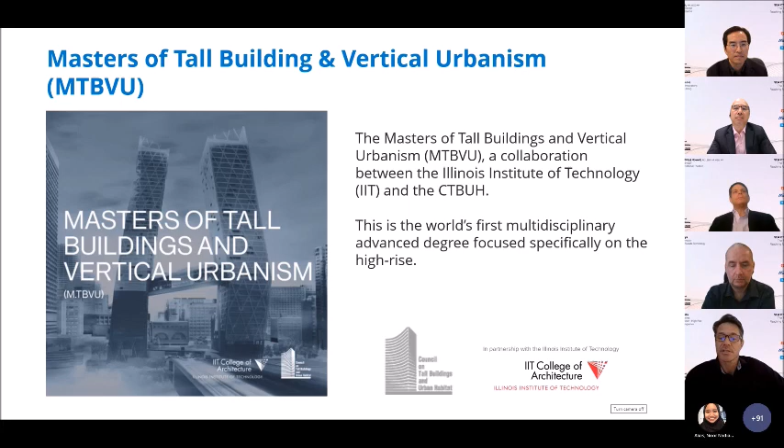Now, the Future City is actually a global conference that's already taken place over 19 plus cities. Some of them physical, some of them webinars like they are today. But it's been really great to see us change our program. I had a chance to actually participate in the London and the Copenhagen event. Really happy to be here with you today too. But it was so nice for people to get together again physically to be able to meet and discuss. And so far, the Future City conference has been over 1,000 delegates, 200 plus presenters in close to 20 cities

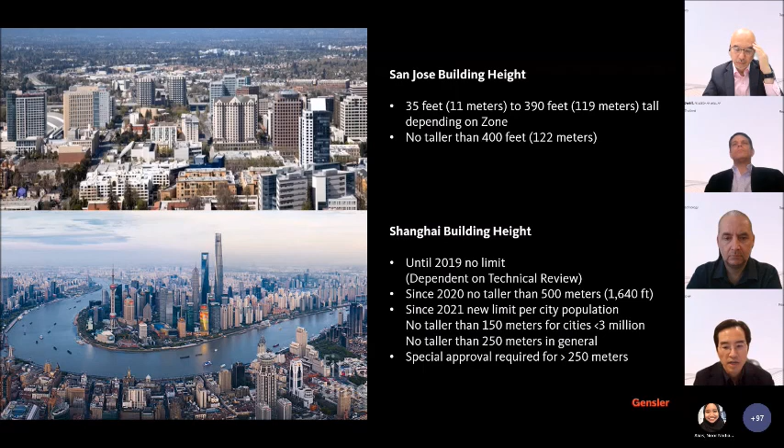So all this shows that, as supporters and fans of tall buildings, as designers and developers of this building typology, we get fascinated with the height and features and the facade design and things like this. But ultimately, the tall building is to bring density and people into the city. And we have to remember that we want to bring positive impact to urbanization, and that all this is to create a healthier and more sustainable city for the region and for the people living inside.

And the taller we build, the technical challenges become greater, and this requires an additional amount of resources and investment. So really, why we want to build tall and how we can build the best tall building, I think that is a question we have to remind ourselves and remember. And I think it's easy to overlook these from time to time.

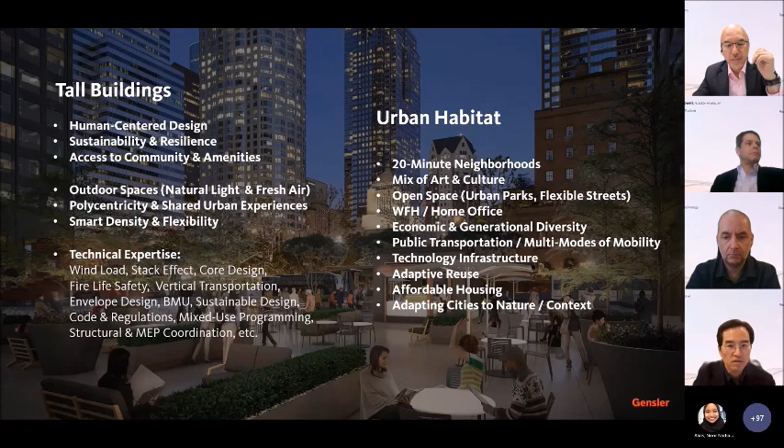The first project is Zhongnan Center. This is the last project I worked on in the Shanghai office. It is 499 meters tall, so just under the 500-meter limit. It is currently under construction. It is near a grand lake and has access to the parks, the canals, and is on axis with the old city and the new city. So it's in a very prominent and beautiful site.

As many developers do, same in China and in the US, the client wanted to really maximize the floor plate, make sure every square meter was utilized. So this building, unlike other super tall towers, really stays straight. It tapers very minimally, and this created a big challenge, not only architecturally for the massing, but structurally because of the wind loads and the core design.

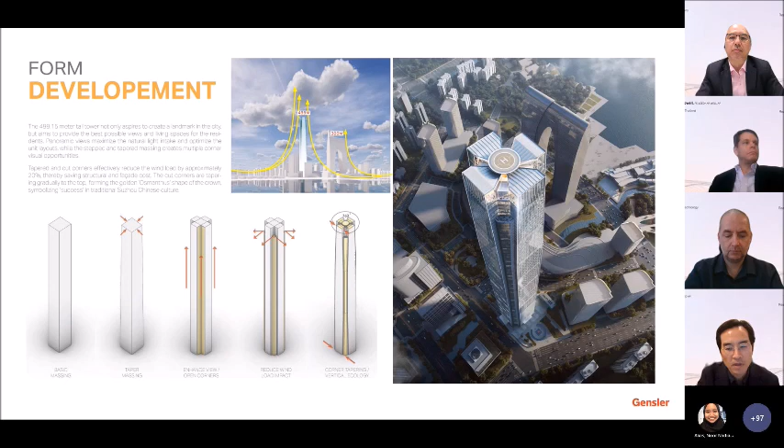So first of all, we try to taper the tower as much as possible, and then we cut the corners to reduce the wind load and disperse the wind path, and still fill with another layer of interior spaces. So we keep the area, but sculpt the exterior so it visually looks less bulky, but also works for us structurally. The biggest highlight and most interesting part of this tower is that it has 7 interior atrium spaces.

So it's a mixed-use tower with office, hotel, apartments, service apartments, and observation. And in order to maintain a livable and a unique residential space, the client really wanted to have these interior courtyards. So mimic outdoor courtyards would bring them into this tall building, which really hasn't been done before. I can only imagine Jinmao Tower, but that's a hotel, and at the very top with different conditions.

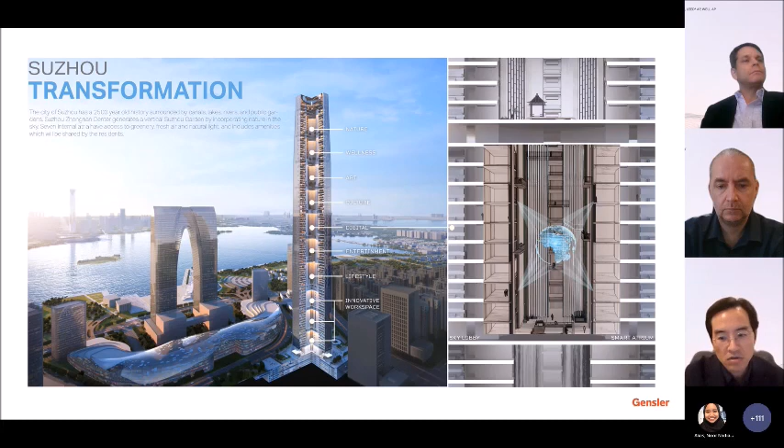So this was one of our biggest challenges, and this really inverts the core design. So rather than the central core getting smaller from the outside as the building goes up, this one, the outer face of the core stays the same, and it becomes hollower and hollower. So we make the atrium bigger and bigger as the building goes up. This creates a very interesting space, but also creates a problem. How do you make this space habitable, humane? And we had to integrate technology in order to resolve this challenge.

So to bring natural light, daylight, and to make a more healthier space, we integrated fiber optic cables. Now there are new technologies where there's solar collectors on the roof which follow the path of the sun, and you can bring daylight into these deep spaces. Not only is this better for people psychologically by feeling connected to the outside, but also it brings the full spectrum of light indoors. So you can grow a wider range of plant species and trees.

Also, to improve the interior condition, we supply fresh air from the bottom. So it has an underfloor air supply system, and the exhaust is at the top. So this creates a natural flow of air, and also minimizes the volume of space we need to condition. So it's more efficient and also healthier and more comfortable for the people inside.

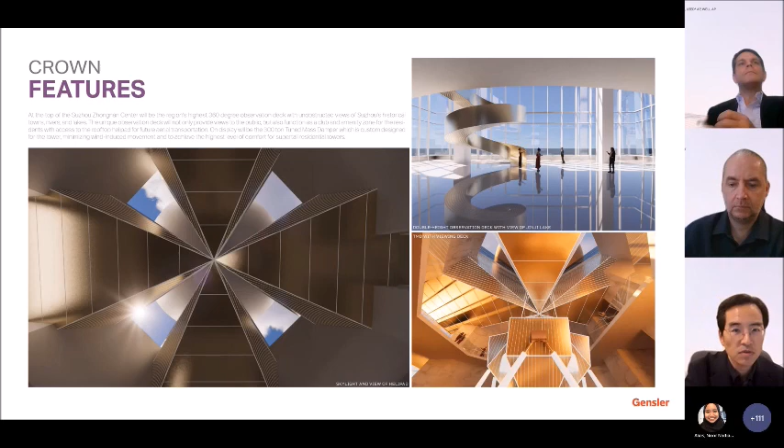And at the top of the building, we have an observation deck with a tuned mass damper on display. And again, we try to really maximize the view, also bring daylight into the building. So in the center of the crown, above the TMD, we have these skylights where daylight is brought into the building, where you can see the sky from the center and view the lake with 360-degree views. So this is the view of the crown, where we really tried to maximize transparency, connection to the outside, and views to the surrounding site.

Next project is another 500-meter tower in Fuzhou, and this one tried to bring nature into the tower in a different way. This also is a very complex mixed-use tower, and as most of you know, a single-use tower is really not practical nowadays with the sheer height and amount of floor area. But also, in order to make this economically viable and a 24-hour building, the client and the developers really tried to mix program, and the residential part is key, because they can sell the units, but also it makes the building alive and functioning throughout the day and the year.

Where the previous tower had the residential up in the top zones, this tower actually has them on the bottom portion, and this was due to a regional regulation where apartment buildings cannot be taller than 150 meters. And the government said, although this is a 500-meter tower, the apartments cannot exceed 150. So we had this unique situation where the floor plates are the biggest. We have the residential spaces, and the offices above occupied the smaller floor plates.

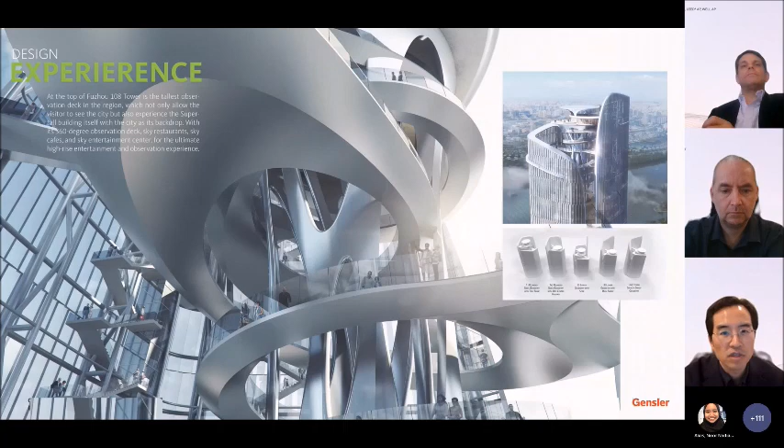Through various studies, we tried to understand, I'll skip some of these images, how to make use of these large floor plates. And eventually, we have carved out the main area facing the ocean, and create this large atrium space within the residential zones. So if the previous project had the atrium in the center of the core, now we have an atrium facing one side, and this is the southern side of the tower.

So this is a little bit similar to the Shanghai Tower diagram, where we have a sky garden within the tall building atrium. But what's different is the outer layer here is much more permeable with operable facade, which allows natural air and light to come in.

So this is a semi-indoor-outdoor space. So you have the benefit of not leaving the building: directly outside your apartment, you have this indoor garden or park at every 10 floors. And this also creates a buffer from the southern sunlight in the summer and can become a solar collection space during the winter times. So these are two different ways we try to bring nature and a more park-like outdoor space into these tall buildings for a 500-meter tower.

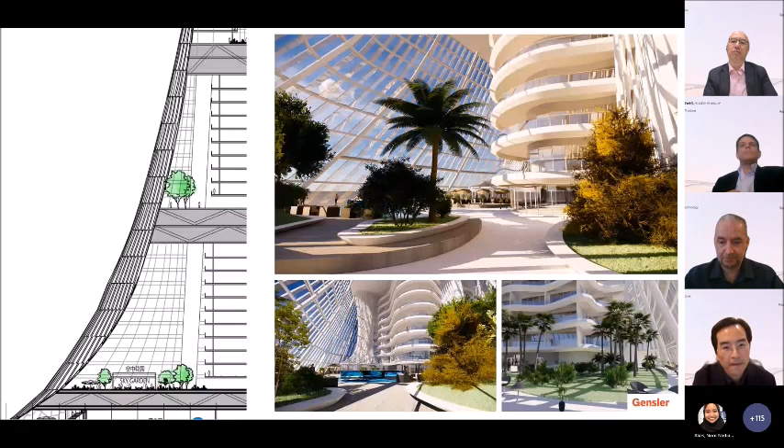And we are really trying to introduce this hybrid tall building typology where we are creating these more massive floor plates, but carved and cut to create a more human scale space on the ground, but also bring in daylight and air into these deep floor plates. Again, similar to the first tower I showed, the developers are really trying to maximize the efficiency, which is part of the reason that the massive floor plate design is happening.

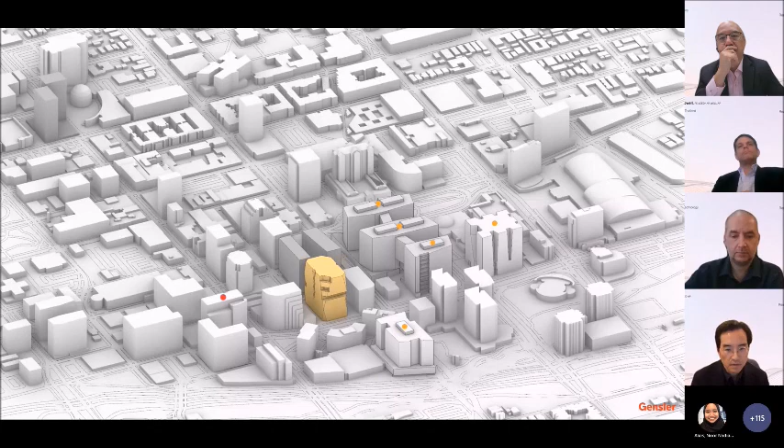Also, because of the technology companies' request to have these large flexible floor plates where they can lay out different programs, shift the interior layout if needed, and also promote communication and more interaction between teams and groups. So the floor plates are getting bigger, and interior connections with stairs and other visual connections become more important. The red dot again is the location of Gensler's office, just to give you a feeling of downtown San Jose and where we are located.

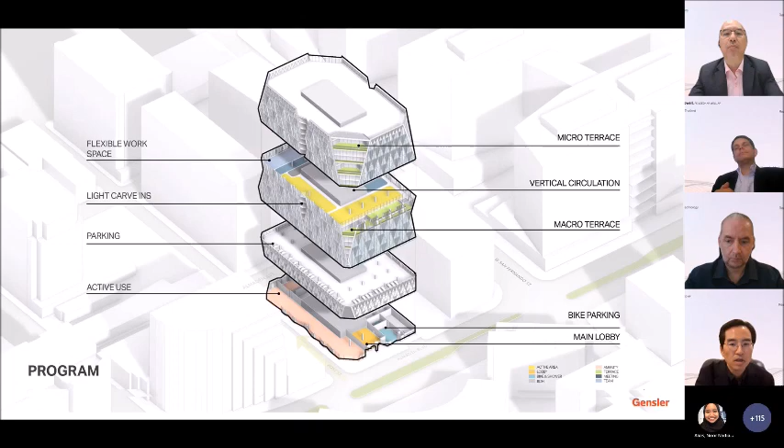So here we started with the maximum buildable envelope, and then studied the views and spaces where it would be best to create these outdoor terraces to have views and outdoor spaces where people can enjoy. So towards the internal side of the block, we have flexible working spaces, and towards the outer side, the main street and corners, we create these micro terraces and macro terraces where people can enjoy the outdoors and take a break from work, but also integrate and socialize for collaboration, recreation, and even dining.

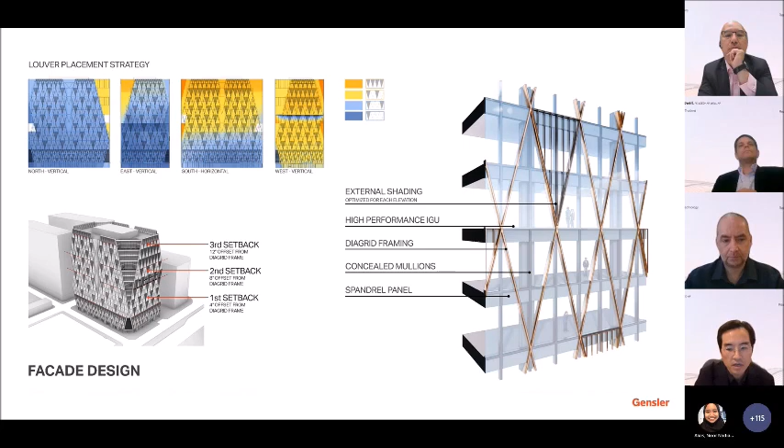Also, we've done extensive solar studies to understand what type of sun shading we could introduce to the building. So on the north, east, and west sides, we have added vertical louvers to reduce glare, but still provide views to the outside. But on the southern side, we have added horizontal louvers. So we are customizing the facade details depending on the solar condition and orientation.

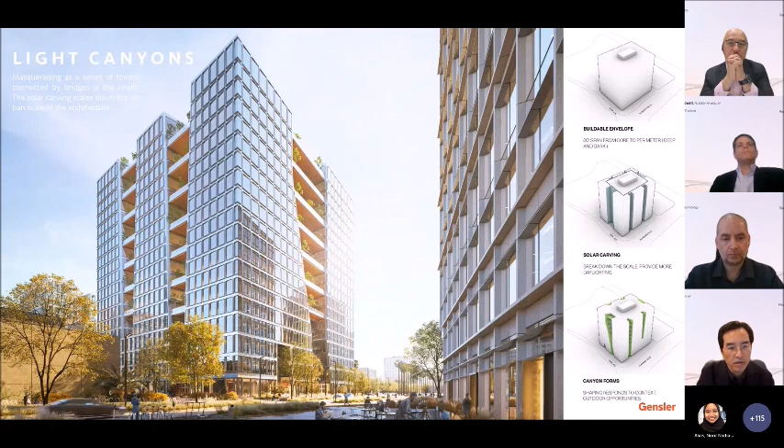This project is another project inside downtown San Jose, and we have a similar idea of creating these outdoor balconies. We've called them bridges in this case, and again, the block is a massive block with 80-foot deep floor plates from the core. So they're almost 25 meters deep, which is more than 1.5 of a typical office lease space. However, we've carved these light wells or canyons so daylight can penetrate deep into the space and naturally create these outdoor break spaces within the space.

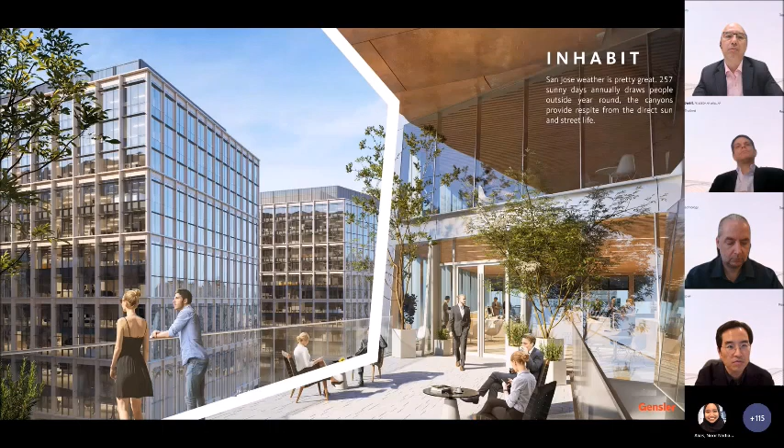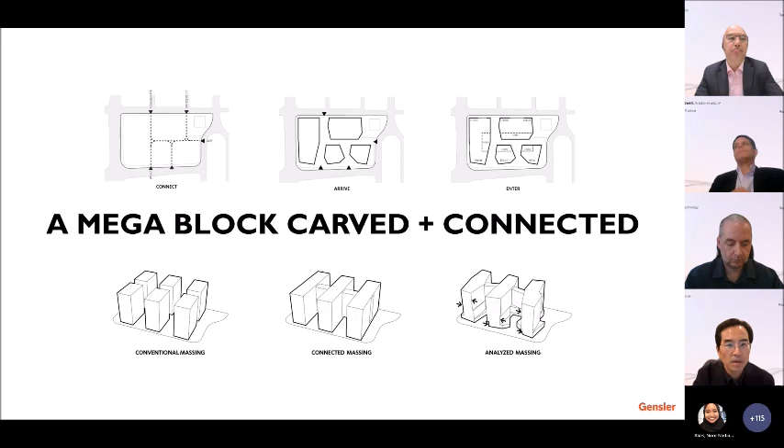Here again, it's a great site directly next to a city park, and this project again tries to take advantage of the large city block that it's occupying, and we have created these 3 broken blocks connected by sky bridges. So at the ground level, the paths are connected with the existing streets and alleys to bring people in, but then we carve away spaces to create natural entrances and resting spaces. So the park system is brought into the block and then also brought up into the upper levels through the bridges and the roof garden.

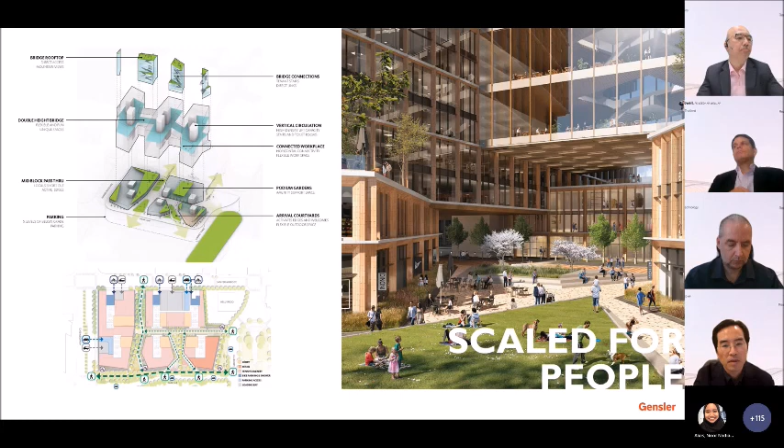So we are trying to connect to the human scale on the ground, and then with the people and workers on the upper levels. The height of these towers are about 110 to 120 meters. And if you compare the dimension with a 300-meter tower that I worked on in Shanghai, it's actually quite comparable to cutting this 300-meter tower into 3 blocks and connecting them with bridges.

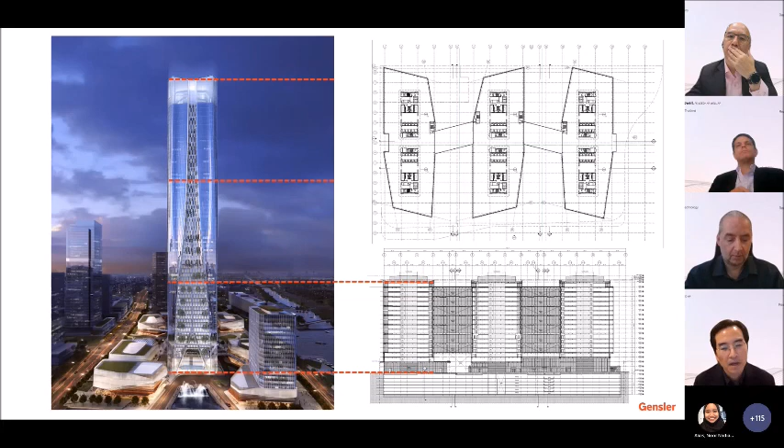So on the left, where we try to integrate these outdoor spaces on the face of the tower, we're able to do the same with these sky bridges and at the ground level parks connected to the city park.

So that's the conclusion of my presentation. Once again, this journey has reminded me that tall buildings are for the people and for the city, and it's the urban condition and urban habitat that we are trying to improve. And the tall buildings are not objects on themselves, but part of the urban environment.

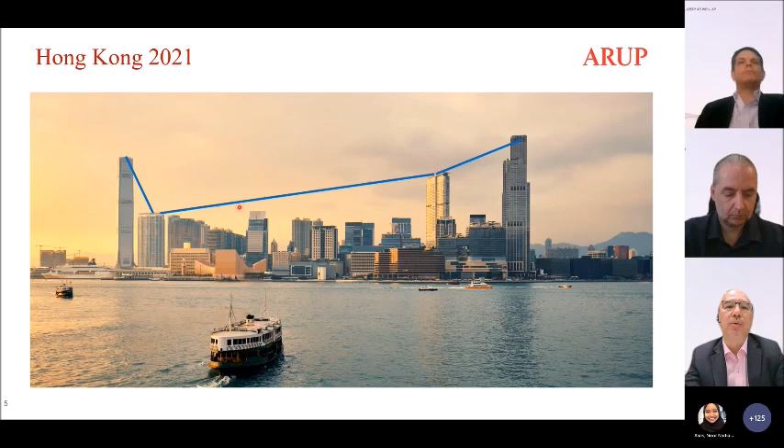At the same time, the population of Shanghai increased - in the 90s it was probably less than 10 million people, and now we have 26 to 28 million for the whole of Shanghai. Remember, Pudong is just part of Shanghai - we have other areas also developing. This new skyline has changed, marking another remarkable journey for the city and for the world.

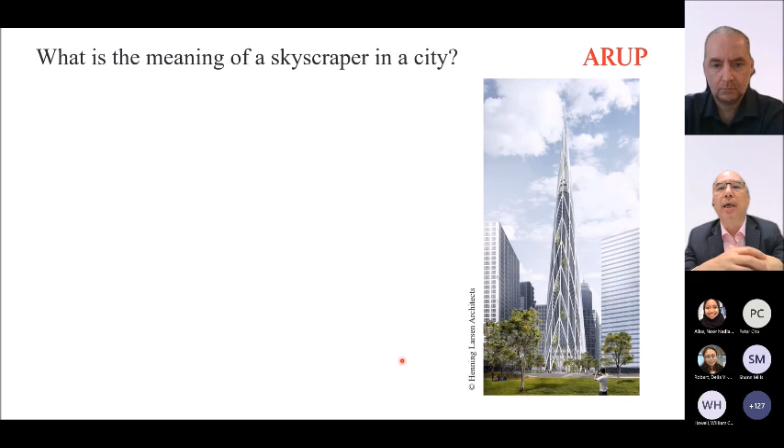So we will ask a question, what's the meaning of a skyscraper in a city? What's the meaning? Why do we have to go for tall buildings? Of course, some people will say that it's a symbol of money, power, or economic status. I quite agree with it. But at the same time, maybe it's because of the city density.

City density is also a function of the income of people. That means if you go to a city, the more density a city has, it's supposed the income of the people in the city is more, compared with the rural or suburban area. You look at Tokyo, London, New York, Hong Kong also - I think you will see this function.

Or probably some countries or cities want to say, 'I want to have a flag in the world.' At the same time, when you look at the building, it will remind people that this is a building in which city or country. I think lots of cities would like to do so, because they want to increase their tourism, etc.

This is why I say every city should have its identity, or I could call it the light of a city. So when you look at the building, you will see what city it is. You look at ICC, this is Hong Kong. Or you look at the CITIC Tower, this is Beijing, or Shanghai Tower, this is Shanghai, etc.

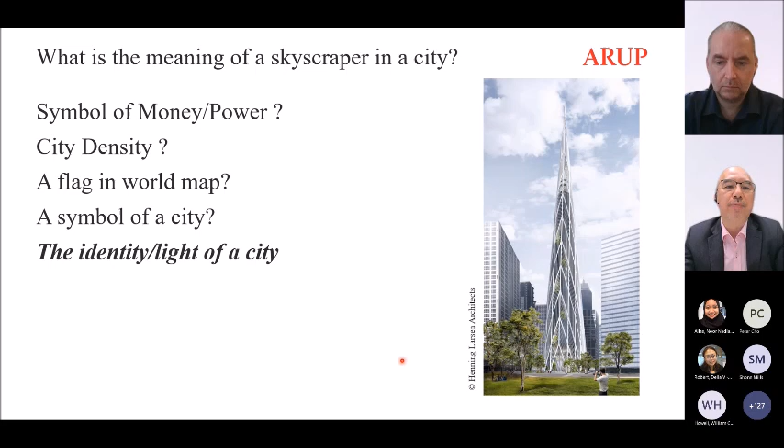Now you will see whether it's about the functional building, or whether the ambitions of the developer are to go higher, or they want to fully utilize the area. This is another thing that we should look at.

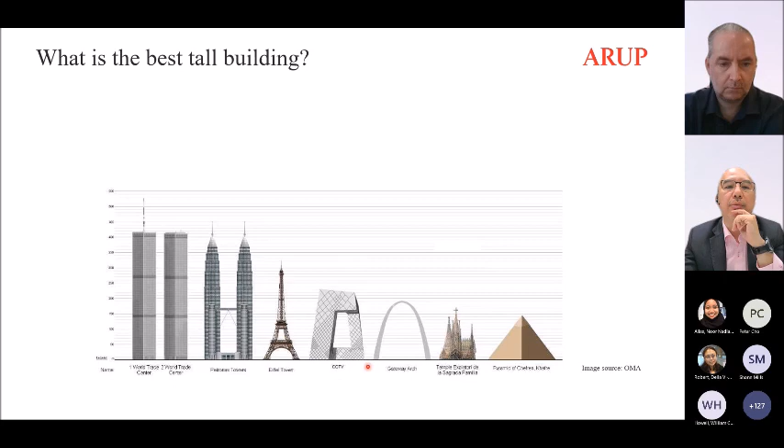What's meant by the best tall building, right? Everyone may have their own definition, whether you want to be in shape, or in form, or so.

Koolhaas said that instead of competing in the hopeless race of ultimate heights, dominance of the skyline can be achieved only for a short period of time, sooner or later. That means you say, wow, this is the tallest building, but what he means is probably that the fame is very short, because another challenge will come, and another, and another.

That's why when he created the CCTV building, he had a different way of looking at it, by means of artistic expression, a very special form, to make it spectacular. This is probably the way a lot of architects and developers are looking for.

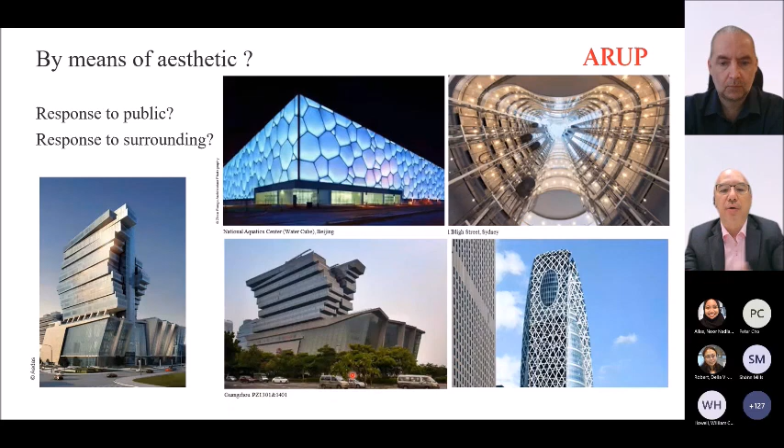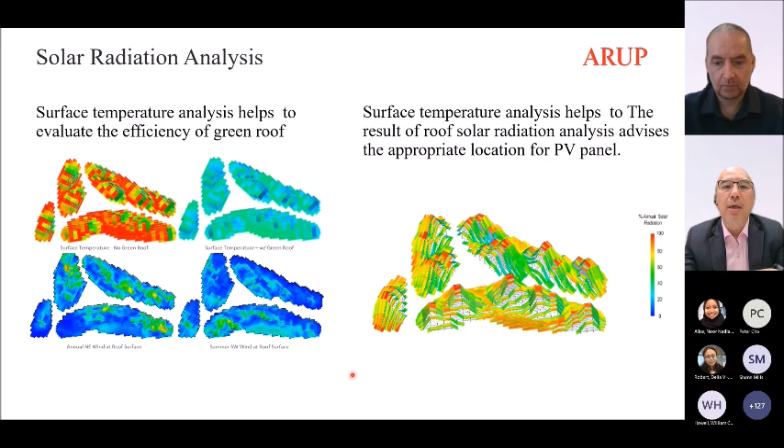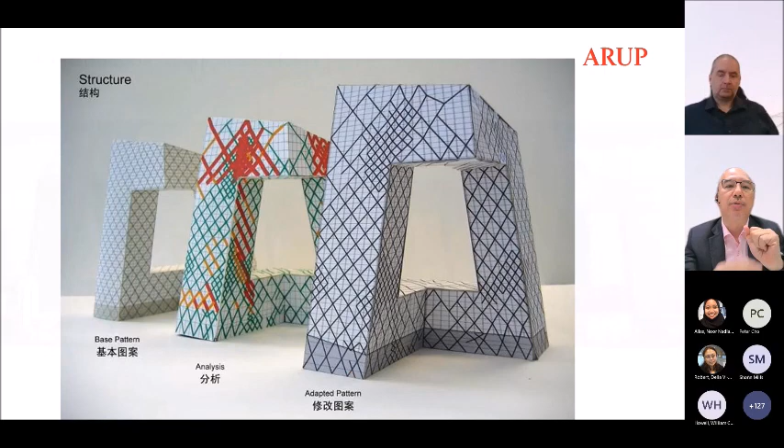This unique pattern and form also created a lot of challenges for us as structural engineers in terms of how it was going to be built. In the design, we had already considered a couple of ways of doing it, and we were fortunate that the contractor came up with the one we liked most - and also the one with the most challenge.

It linked up, all within the tolerance of our prediction. So among the elements of a skyscraper, probably function is one.

And of course we need to consider sustainability, and uniqueness. All these - we also need to consider energy efficiency, artistic value, iconic status, technology, and timing. Technology and timing are sometimes important for engineers because we are limited at the moment.

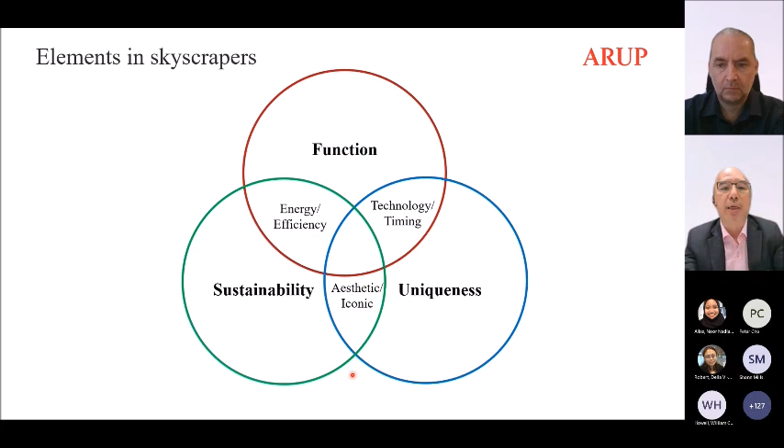Usually our technology is limited to things like concrete and steel reinforcement, or steel. Whether we can go for even higher strength concrete or higher strength steel all affects and limits our creativity or innovation. But because of these material limitations, what we can do is have an innovative mindset to solve the problem - creating different structural systems to suit different heights of buildings and different forms of buildings.

Now, there is no perfect structural system, right? Every building, because of its uniqueness, because of its geometry, we have to design to suit. And sometimes we will create a new system in order to suit. And you go for a bit low rise; my definition of low rise is like 150 meters, and up to super high rise will be 600 meters, etc. All come with a different form, different structural form, different lateral system.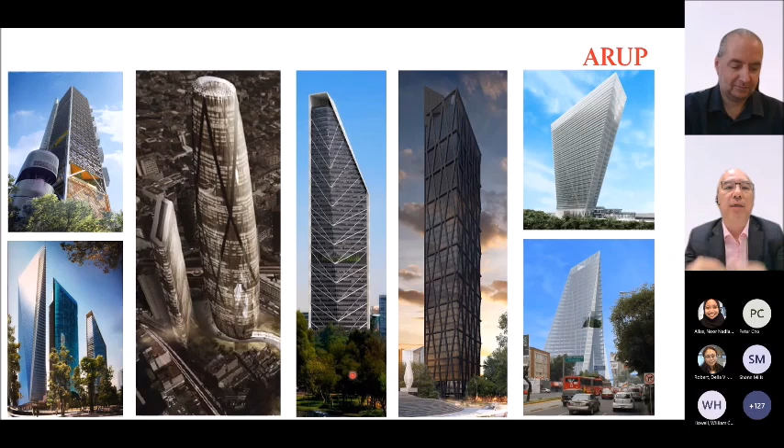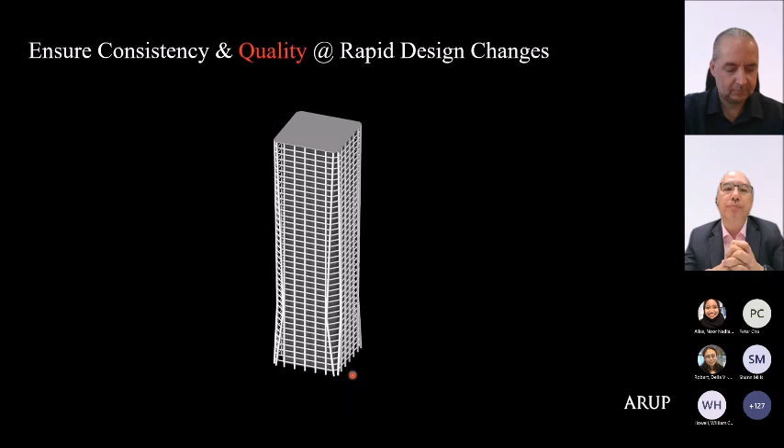But of course, it's not that simple as well, because now architects have new ideas, a very contemporary art concept requirement. So we have to find a new way of solving the problem. In order to solve the problem, we have our own artificial intelligence system that will help decide whether we should use a tube-in-tube system or mega brace system or outrigger system and so forth. It helps the engineer decide what's best, and also meets the function of the building, whether it's an office, residential, and so on.

And for BIM, people may say, yeah, we use a lot of BIM. So what is next? The next is we have our own smart AI console now for buildings. With BIM, we can also put lots of sensors, so that we can capture the behavior of the structure from day to day, week to week, year to year, and calculate the energy consumption, how we can improve it, which season we need more energy, or which season less energy, and so forth. So it looks like a person, okay?

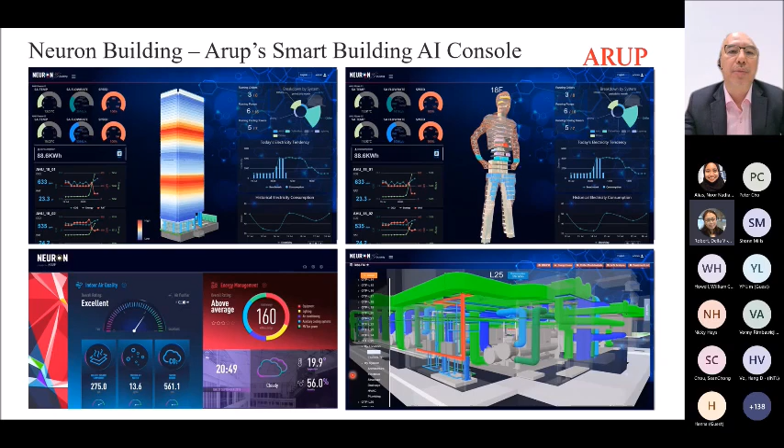So a lot of cities have a landmark: in Chongqing we have Raffles City, in Guangzhou we have the Guangzhou Sightseeing Tower, in Thailand, also in Vietnam, and even in Cambodia. So again, whether your city would like to have a landmark, to show your existence to the world, that you are a great city.

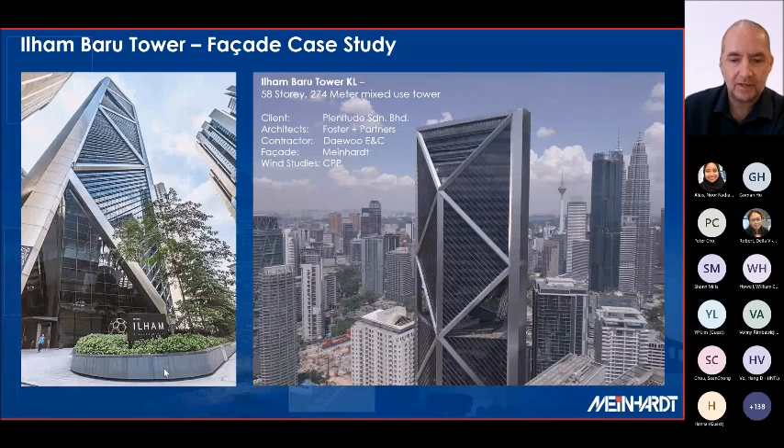Hi, we seem to be experiencing some technical difficulties on Nicky's end. Let's give him some time for him to sort it out. Nadia, we have a question that was missed for Dr. Goman, right? Sorry, has my sound come back? Hi, Nicky. Yeah, we got you back. Just reshare the presentation. At least it wasn't the blue screen of death, but I was very worried there for a minute. Let me re-present. Have I got my presentation back? Yes. You can still hear me? Yes, this is the last slide you were showing. All right, I don't know how much you missed, so I'll just pick up where I left off and fingers crossed that that doesn't happen again.

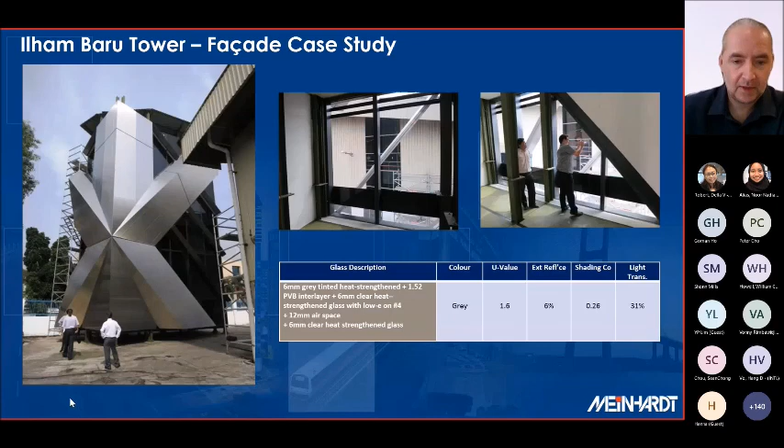Various glazing options were considered, and a grey tinted glass with a visible light transmission of 31% and a shading coefficient of 0.26 was selected as appropriate, which from the outside looks very dark, as you'll see here, but from the inside looks perfectly clear. That's due to the kind of neutral tint of the glass. So you don't really notice the tint from the inside. So through a combination of high-performance glazing and diagonal shading devices, a 40% reduction of solar heat gain to the tower was achieved. The facade contributed to a LEED Platinum rating award for the project.

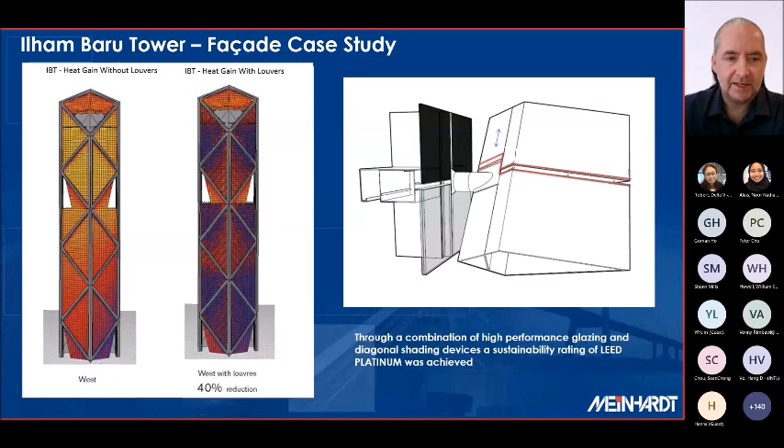So typically for very tall buildings, an ideal facade installation would consist of unitized panels that are launched from nearby floors into position with all the fenestration elements such as louvres, bullnoses, etc., already fixed onto the panels. And all of the launching would happen on the inside face, and you wouldn't go outside hanging off the building to undertake any additional fixing.

IB Tower had to buck this trend, however, because of the megastrut cladding elements. So we needed external access via mast climbers to install those megastruts. And you can see here a series of brackets first. After the brackets, we had subframing, and then the panels were installed. So it wasn't the most ideal method of undertaking a tall building facade, but it was necessary for this particular type of installation works.

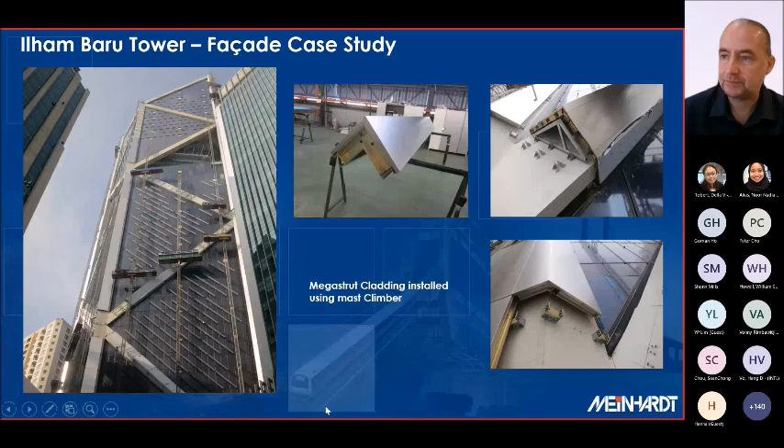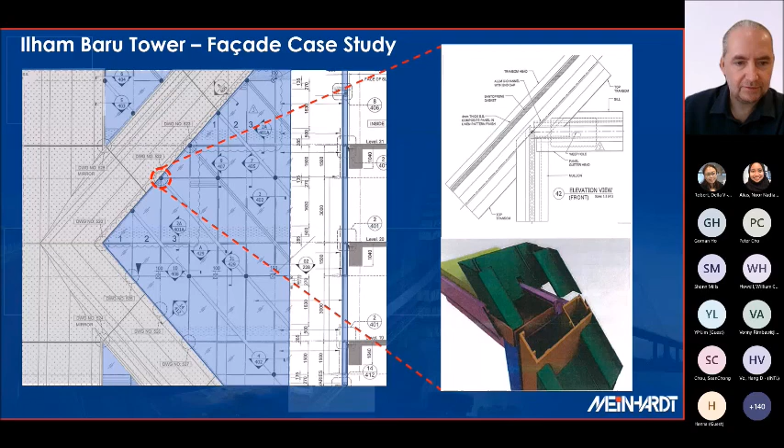In terms of wind and pressure studies, the first exercise undertaken was a cladding wind tunnel test. So the Malaysian code 1553 was used to estimate the cladding pressures, and a maximum pressure of 2.2 kPa was calculated. You can see the graphic on the left-hand side here that shows how we undertook that study. During the wind tunnel test, the pressures recorded never exceeded 2 kPa. So this allowed for the facade aluminium member sizes to be reduced accordingly.

As a majority of the curtain wall was in a 1.5 kPa zone, which is shown here in blue, we then used that to engineer the profiles, and then we would stiffen them only in areas where we exceeded that. So we never really follow the maximum wind pressure that we get off a wind tunnel test. We go with the majority and then just stiffen areas accordingly. So big savings on aluminium costs as a result of that.

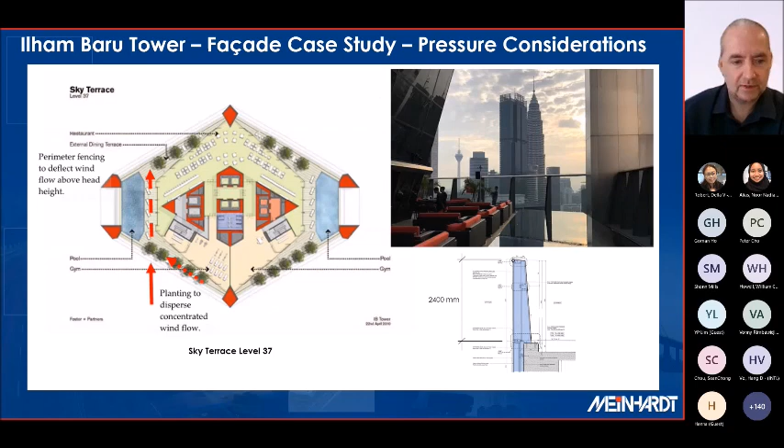So we brought in a 2.4 meter barricade around the perimeter there, which shielded against these cross breezes that will give you a problem, but still allowed an ambient temperature and ambient breeze. So you can see there's a very calm water as a result of that study.

The problem being, when we checked the pressures and the study of what would happen to these internal spaces as a result of those doors being open, we got a direct path of air infiltration or pressure infiltration into the lift shafts. So we needed a double lock system, because if you allow these high pressures into your lift shafts, then your lift doors may jam, or the travel could become less smooth and noisy. You can hear the gusts.

So there's two concerns with lift shafts in tall buildings that have an influence on facades. So the first, as per the last slide, are concerns with direct air paths through the facade to the lift core. These can come from openable windows, doors, lobby area, louvres, building breaks such as MEP floors, etc. And we've highlighted on this slide here all the various zones that would allow these pressures to go in through the facade into the lift shaft.

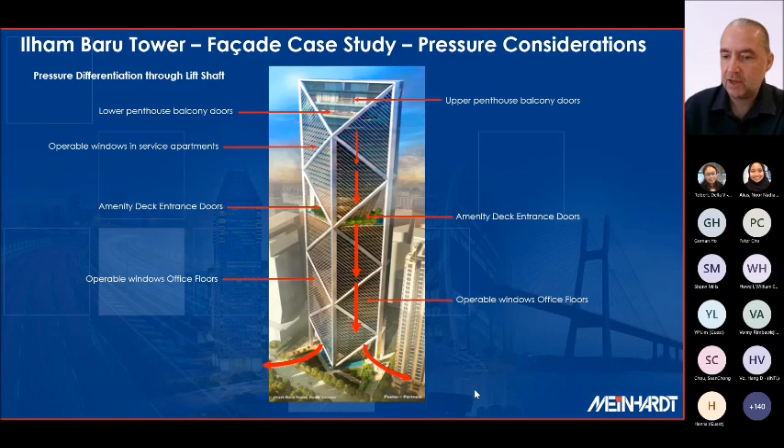And a lot of tall buildings use vestibules, or in some cases revolving doors, to limit this, and then your wind engineer can undertake simulations to evaluate the success of the proposed approaches. So after reviewing the level 37 wind studies, it was agreed the external deck entrance doors would become automatic sliders. I've got some video footage here.

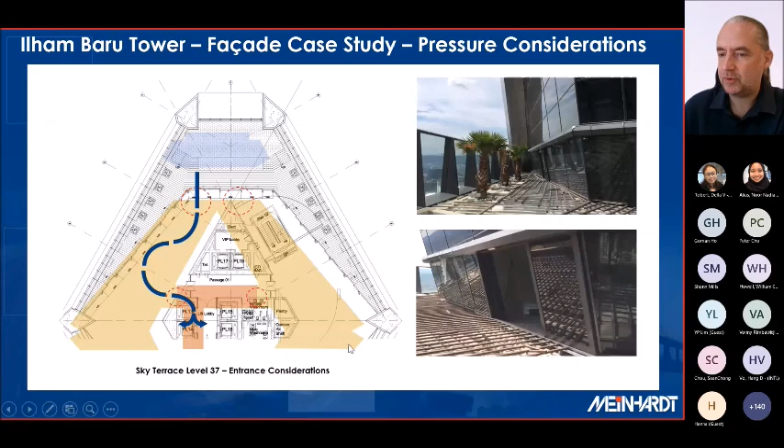I've got a feeling it's going to be a little bit stunted, but that's one of the architects from Foster's that is walking towards these sliding doors that are tilted forwards, and checking the smooth operation of those particular doors. So with a combination of the sliders automatically closing and the internal doors, we had enough of a double lock there that would work, and we don't have problems as a result with the lift shaft.

So that's the first study, which is a guide of the overall types of analysis that can be undertaken on pressures. And for the second study, this is a very specific look at savings that we achieved on one project. So this is Bangsar 61, 34-story, 160-meter towers. Client is PHB Properties, and CPP worked directly under Meinhardt. We engaged them to undertake these analyses.

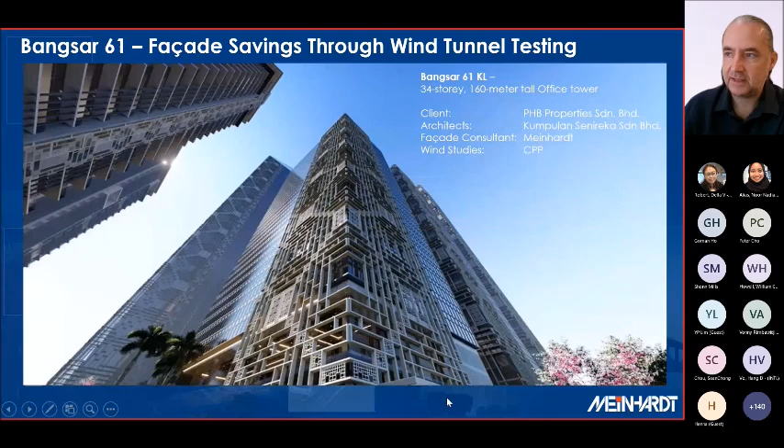So on this first slide, it shows the facade system. It comprises a fully unitized system with a 450mm bullnose profile attached to the unitized panel. The bullnose is also unitized or separated into two, so we can fix all these external elements onto the panels first, launch them off the building, and we never need to be on the outside of the building.

Okay, so wind tunnel testing for the project was undertaken rather late. And at the time, the client team visited the test laboratory along with myself, and we were able to physically stand within the wind chamber and check the pressures at the perimeter of the building using rods and wool tufts. These are cylindrical metal rods with wool at the end, and you can move those around your building whilst the wind tunnel is operational, and it gives you an indication of where the bigger pressures are. So it's almost giving you a preliminary result.

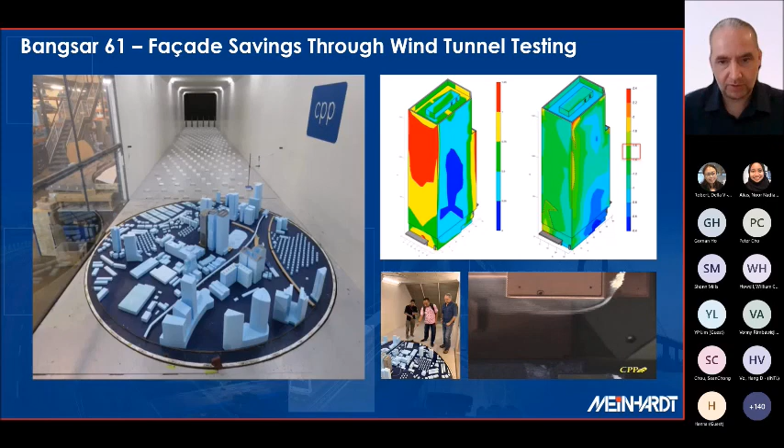There's a little graphic here of wind going around the building and what happens with the pressures as you get a positive, negative buildup at the ends there. You expect more wind around the sides of the corners of the building because you do get drag and pull around those areas.

So this was the wind load diagram, where you have the positive pressures and the negative pressures mapped here. And what we did is we kind of reverse engineered the results. So we had a glazing system that was a double glazed 10/10 glass. And we looked at if we reduce the glass thickness to 8 millimeters instead of 10/10, then what kind of pressure could that glass withstand? And it transpired it was 1.6 kPa.

So we asked CPP to use a 1.6 and map that across their facade using the results of the wind tunnel. And we found that inside the tower proper, where we've got all the unitized panels, they all fell within the 1.6 zone. On the parapet roof area, it did increase, and down at the podium it increased, but they were using different systems. So we could reduce the cost of the glass within the tower by undertaking that level of analysis on the 1.6 kPa.

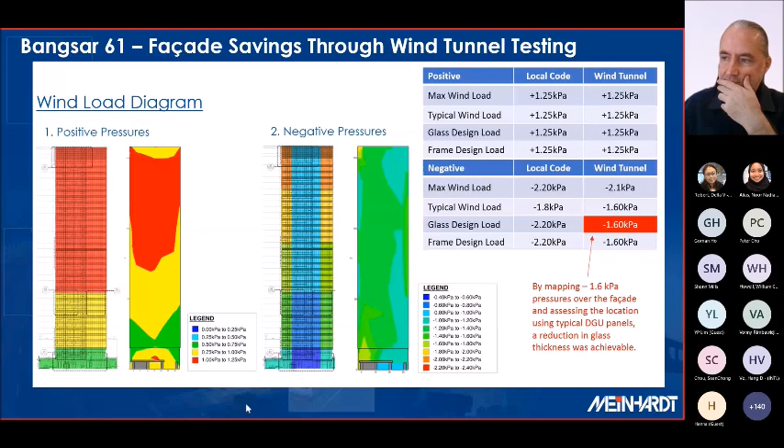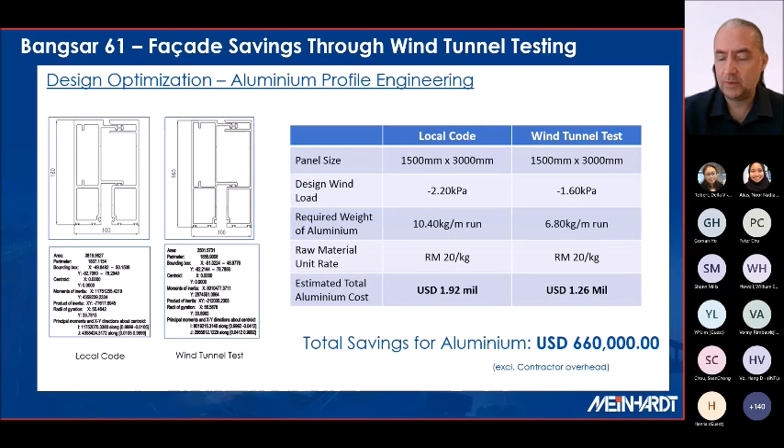We then analysed the aluminium members, and we could again reduce from the 2.2 kPa to the 1.6. The weight of the aluminium per meter run reduced from 10.4 kg to 6.8 kg. So using a raw material rate of 20 per kg, we saved $660,000 on aluminium costs. So keeping in mind that we had the bull noses and various other elements that we can make reductions from, but we've just analysed two elements of the facade.

And if you add a 10% for a contractor price, because these are raw material costs that we're dealing with, you're looking at somewhere in the region of $1.2 million in savings. And those $1.2 million were on a test that cost $20,000. So for us, it was a bit of a no-brainer. These tests are absolutely worth it. Look at the return on that kind of money, 20K, and you're saving 1.2 million.

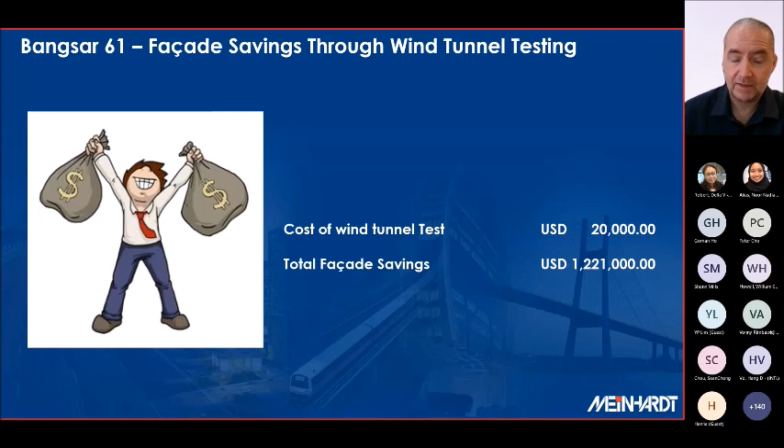So I hope that study addresses a question. Every building's different, so every building would need this kind of analysis. It's not possible to say that you're going to get X amount per building. You have to undertake the works. But when you look at the returns, it's a fantastic investment to undertake these level of studies on your facade, even with a 34-story building. And when you take into account that right now materials are up by 30% for both glass and aluminium, it only gets better and better in terms of the saving that you get.

So that's the end of my presentation. Thank you. I've got no idea how long I went for. I don't know whether that was 20 minutes or whether it seemed like 5 minutes to me. You're still in time. You're in time, Nikki, don't worry.

So we have one question for you. Can you see in the panel box under publish? No, I'm going to stop sharing my screen if that's okay. Yeah, sure. All I could see was my presentation. My box is not working. You just let me know the question and I'll answer it best I can.

It's from Peter Duffy. He asks, when you conducted the visual and performance tests, were there any technical or quality findings that had to be corrected prior to the final installation? Yeah, so on the visual mock-up, not so much, because we were really just looking at the aesthetic. We were fortunate with the diamond, the node point connections of those stainless steel elements that came in.

It worked very well. The architects wanted 9-meter long panels, and through a series of conversations with them, we agreed that we would split these long 9-meter panels into 4.5 and then hairline joint them in the center so they would look 9 meters long when actually they were more manageable as 4.5 meters. But we were concerned that when these came together, because of the intricacies of the patterns, we would get misalignment. And what the visual mock-up showed us was that we can actually control this, through a series of adjustable brackets, raise and lower and make these adjustments. So we got very clean connections, which was great.

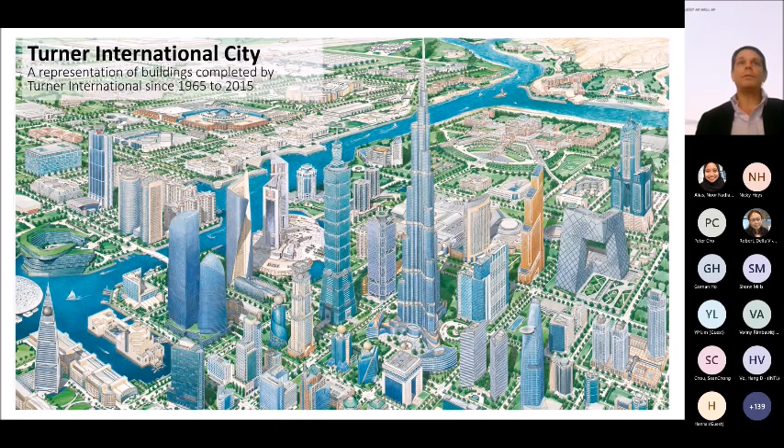So onwards to the Bitexco Financial Tower. This tower was designed by Carlos Zapata.

The building is iconic. You see its shape, it's different. What's maybe not apparent is that every single floor is different. Every floor is asymmetric to itself, so about both axes, the X and Y axis, there's no symmetry. And every floor is either growing in size or reducing in size. That presented quite a few structural nuances as well as some constructability issues.

Likewise, it's a slender building. At its narrow axis, it's only a 1:10 slenderness ratio.

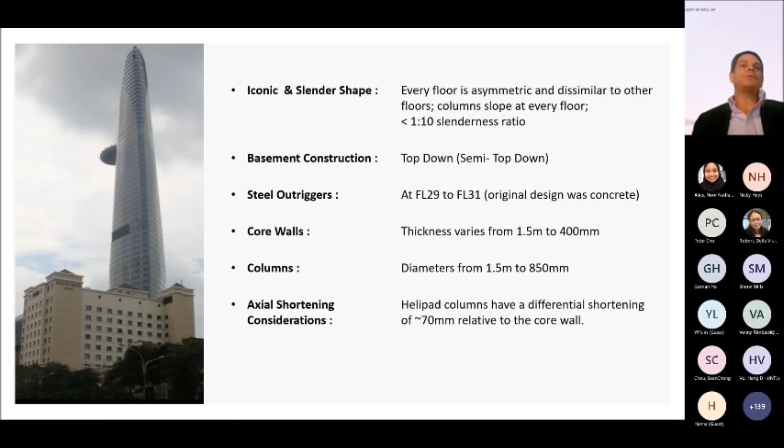Some other facts: it was top-down building, or top-down basements I should say, semi-top-down. The steel outriggers are at the 29th to 31st floor. The original design was in concrete, which I'll touch upon. The core walls actually vary from 1.5 meters thick down to 400 at the top, and we have columns that go from 1.5 meters down to 850. One of the things I'll focus on is the axial shortening, where the helipad columns have a differential shortening of around 70 millimeters relative to the core wall.

So I touched upon the structural background already, but it's basically a reinforced concrete building with flat slabs and so on. But the podium is structural steel, and the lateral system is comprised of the core wall and structural steel outriggers, which we did through a revised design. The foundation sits on a 4-meter thick piled mat, and we have piles that go down to about 85 meters.

So just a couple structural facts for the structural engineers in the audience. The building mass is around 1 million kilonewtons, or 100,000 tons. You can see some of the base shear reactions due to wind and overturning moment, which govern the lateral load design.

The dynamic response, that is how much the tower moves laterally due to lateral excitation, is—you can see it's got a pretty short period for a building this tall. Its longest period is only about 5.45 seconds. And that led to an acceleration of around 30 milli-g's at the top.

This is interesting because our office is actually near the top of this building, and some of our staff can feel this movement on windy days. So much so that at one point the question came back to me: does this building move a lot? And the answer is yes, it does—that was found through the wind tunnel testing. This actually exceeded the normal criteria for acceptable lateral acceleration, but the decision was made that it would be okay and doesn't affect the overall performance of the building much. So it was accepted, and yeah, sometimes on windy days people can feel it moving.

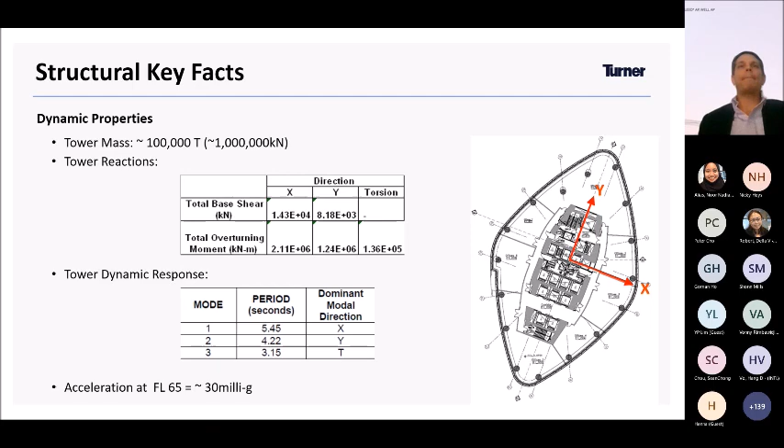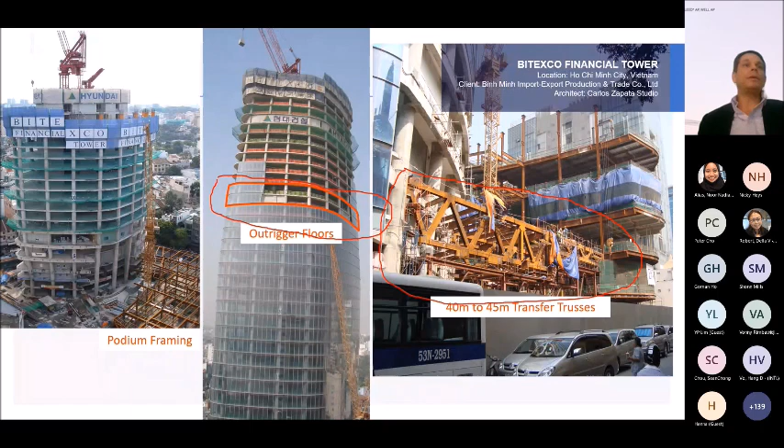So some of the steel features: we have the outrigger floors highlighted here, from floors 29 to 31. Also there's quite a bit of steel on the building—there's a structural steel podium and also structural steel transfer trusses. So even though it's a concrete building, there's quite a bit of structural steel added to it.

So these are the outriggers—apologies for the side view, but that's how they fit best in the picture. What you can see here is that there's basically 4 rows of outriggers that are, in this case, in structural steel. The outriggers span from the core to the perimeter columns or perimeter belt walls, or belt trusses as we have them.

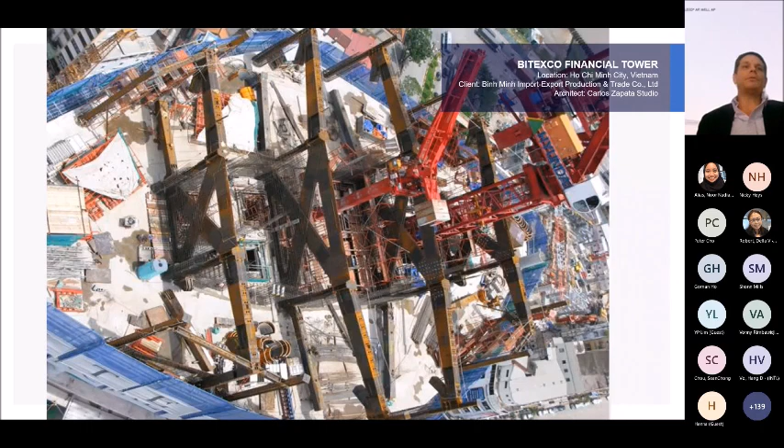In plan view, what you can see is that we have basically 4 of these belt walls to connect outriggers here and here. And where the outriggers had a skew that wasn't too bad relative to the core wall, divider wall to the columns, we just skewed these.

And then opposite on the other side. So it's a combined outrigger system with belt walls where we needed to catch the columns, where the skew would have been too much to handle the relative outrigger forces. We redesigned it from concrete to steel with the contractor for ease of erection.

The total steel tonnage was around 400 tons. This was fabricated in Korea and erected in a total of about 10 days, which is very good for outrigger construction. Granted, this isn't a full outrigger and total perimeter belt wall or belt truss system like you see in some buildings, but overall it was done pretty quickly without slowing down the floor cycle too much. Another key feature is that they stayed disengaged until the tower was topped out—we didn't want the outriggers carrying the floor loads from the perimeter columns down to the core, and I'll explain that a little more after.

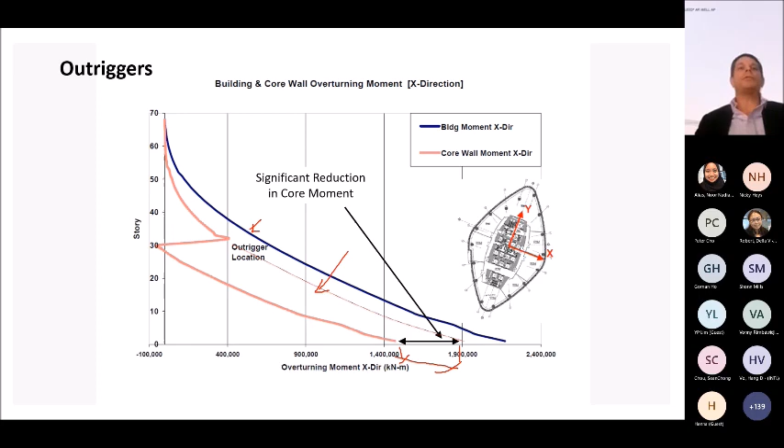So when we first started the project, the intent was to have the outriggers be in concrete. We had a very good concrete subcontractor on site, and they were doing a pretty good job with the flat slabs and the core walls and so on. But as we got into it with them, we realized that the design for concrete outriggers was going to be extremely difficult.

This is in a time when we weren't really doing a lot of 3D modeling for rebar—sort of the earlier days of BIM. We would have required 3D bar bends with D50 rebar, that's 50 millimeter diameter rebar, as well as post-tensioning through the top chord of the outrigger. It was a very complicated rebar system. It could be done, but it was extremely complicated, and we were concerned it would be difficult for the contractor to complete, so we decided to go back to steel—we went with the steel option.

There was also the issue of the diagonal, as mentioned. The diagonal portion here was meant to be disengaged so that the column loads, shown by these arrows coming down, would stay in the column rather than being diverted through this rather stiff outrigger element as the building is built out. We didn't want to have to come back and concrete this outrigger element after it was disengaged once the building was topped out. It could be done, but it was going to affect some of our sequencing in terms of schedule.

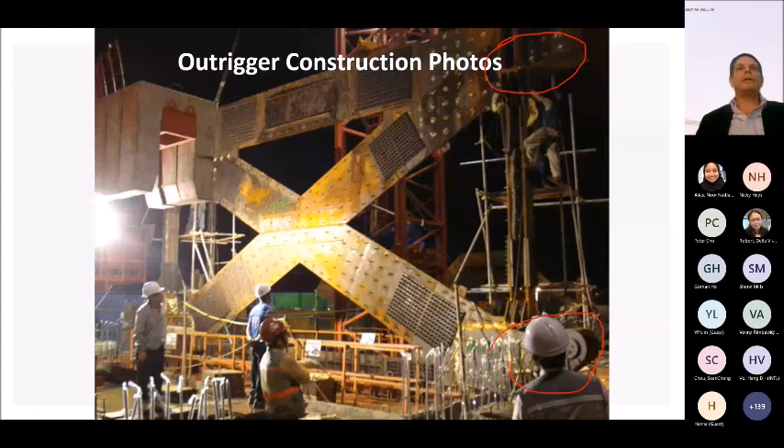So we then moved on to a steel option, and what you can see here is basically steel plates up to 60 millimeters thick that run through the core wall. They hit nodes at the top and bottom, at the interface of the core wall, and then we have node elements that transfer to beams or diagonal elements. In essence this is a composite outrigger system. To carry the shear forces associated with the outrigger chords going through the core wall, we needed these 60 millimeter plates connected through, along with—this was an option from the contractor—actual physical pins, to allow the rotation of the disengaged chord.

So this is an enlarged version of that. When we started, this seemed like a good idea—we said, okay, we'll have the pins.

This will allow for what you see here, whereas you can basically move these guys and swing this lower element up into place. This guy can be swung up, and then we will close this diagonal gap once we top out the building. And this diagonal gap was actually very easy to close once we basically just filled it with thick steel plates and then welded external plates to these box sections.

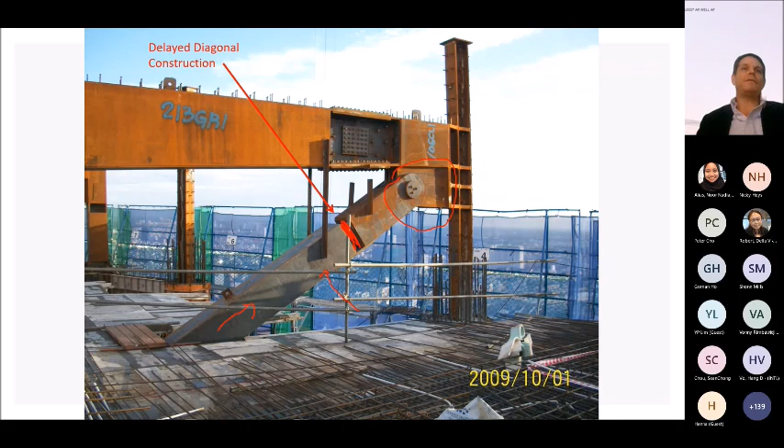However, one of the challenges we realized after we got the pins in is that if you can actually get a pin, here I'm gonna go back. If you can get this pin to go through these 4 plates plus the other 5 plates from the adjoining member, if it can go through easily, you have too much slack in the pin system. And then that means that before you can actually engage the outriggers, there's going to be too much stress on

the core wall. So then we actually had to go back and refit these pin elements to give them a tighter fit. And so although we had the main outrigger system in place, while we were continuing to construct upwards, we had to go back and refabricate these and refit them to get them in. So there was a lesson learned there.

These are some images, again, of the same. And then this is the system overall. So here you can see this is one of the diagonal elements. It's pinned, and then, like I mentioned, it will be swung into place later. And likewise there, and so on. So overall, this was very successful for us. As mentioned earlier, basically these were erected within 10 days.

We realized we wanted to make this change from concrete to steel around the 10th floor of the building, when we were at the 10th floor in terms of construction. And working with the contractor's engineer, myself and a guy from Hyundai named Ko Hee-jung, we were able to go back to the original designers and work out this system. Basically, they let us make the substitutions.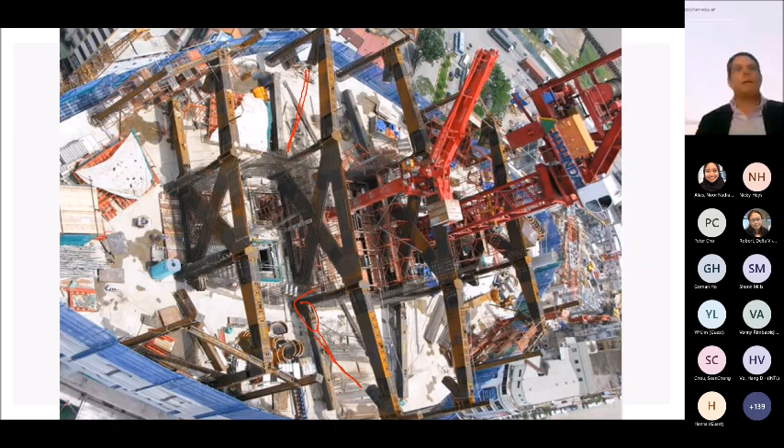So moving on from the outriggers, next consideration, and this was a big consideration for us, was the axial shortening. Axial shortening is something that's common for all of us with super tall buildings. Even though this building's not quite 300 meters, it's not really super tall, but it's something that we deal with frequently in the 250 meters and up range, where you end up having higher stress levels in the columns, typically the perimeter columns, and less stress levels for gravity loads in the core.

And because of that, due to initial loading, the perimeter columns will potentially experience more elastic deformation or initial deformation. And if they're concrete, they're subject to creep and shrinkage. So with that, you actually get even further deformation over time, especially in the first couple of years. And so the engineers for the project, LERA, in their original documents, said, look, we have predicted these shortenings with an initial analysis.

And so what you can see is that they had some columns, these guys, that were actually expected to settle or shorten by around 150 millimeters, and then the closest portion of the core wall only around 75 millimeters. That meant that we had about 75 millimeters difference in height at the 49th floor between here and here.

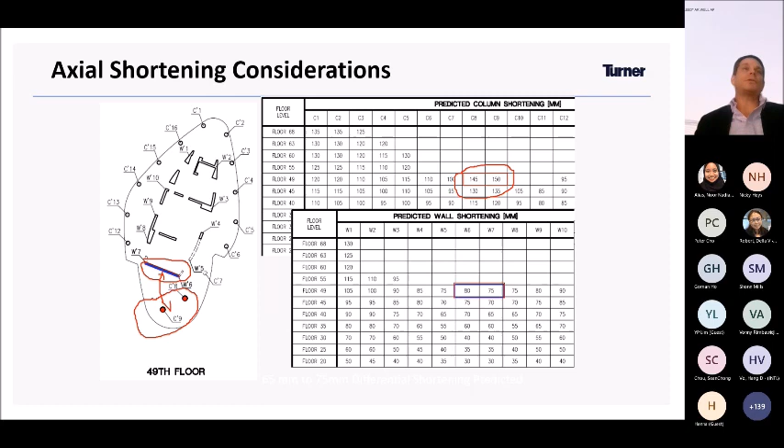So to compensate for that, there were 2 steps. One is we needed the contractor to do a more in-depth analysis, because this was preliminary. And then also we needed to determine the actual concrete properties, do some more rigorous analysis, and then determine a compensation methodology to make sure that overall the building wouldn't have sloping floors or some issues with that. So the first step in that was determining the actual concrete properties.

We did creep tests, long-term creep tests, and shrinkage tests. And I think most people know that creep is deformation due to sustained loading in concrete. And so all concrete, where you see sometimes balconies on old buildings that are starting to deflect, or sometimes stairways that are sagging and things like that.

This data from how the concrete would actually act and respond to sustained loading and shrinkage over time was then plugged into models that followed the building sequence, and then that was used to determine how much we compensate the building, or how much we compensate each column or not, in order to keep the building flush, not leaning, and keep the floors flat.

So what you see here on the left side is a plan where we had all of the various instrumentation. In each column and at various core wall points, we had a lot of these sensors. They're connected to multiplexers and data loggers, and then wireless modems that get monitored throughout the project. So we could look at these in our office and know how much strain or deformation these sensors are undergoing.

So this was actually field installation. This would be in a core wall where we were installing some of the sensors. And then this is being embedded within a core wall. So this is one of those 1.5 meter thick core walls with the strain gauge in the middle. And then this is connecting the multiplexers and data loggers. And what's that lead to?

So basically, as you build the building, every time you add a floor going up, the building sinks a little bit, or the columns have to absorb that additional load. And so you can predict that as we build the building going up with time, there's going to be a certain strain, a certain deformation of the columns where they're expected to shrink, or to settle by this much. And so you have the predicted line, and then you have the actual data readings that we had.

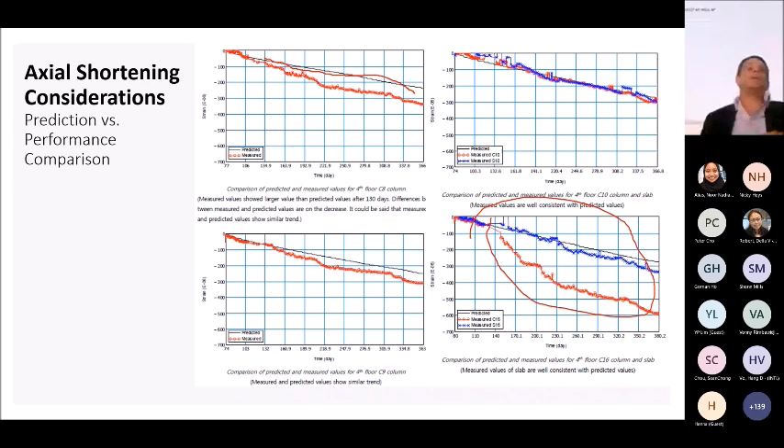And what was actually predicted and measured lined up pretty well, except for this one. This was obviously a bad sensor, so we had to do some additional physical surveying and double check. And eventually we realized that was just a bad sensor. So the other 15 out of 16 were operating properly and as predicted.

And then this leads to a compensation strategy where we figured out how many millimeters per floor we needed to add as a vertical camber, if you will. So basically how much you have to extend the column length with each casting in order to make sure that at topping out, and then over time, the floors would settle to being horizontal.

And then what's that lead to on site? Something kind of simple in the end: extending the column forms as needed. And so you can see that we had to shim 5 millimeters at a time on the column forms. But the key is tracking this and knowing what this is, and then monitoring it through iterative cycles through the data loggers.

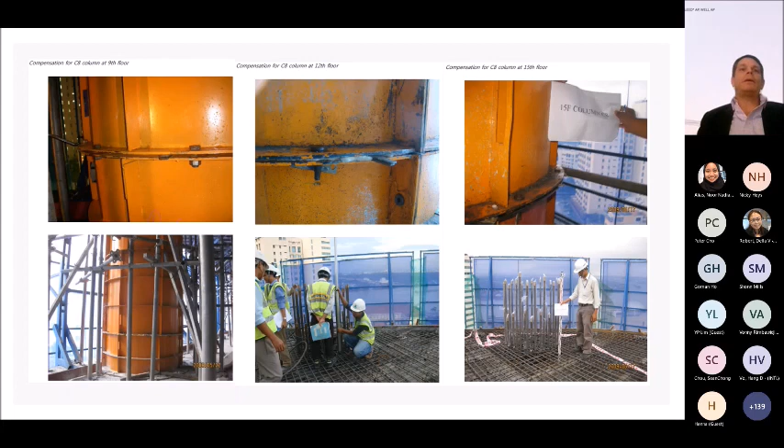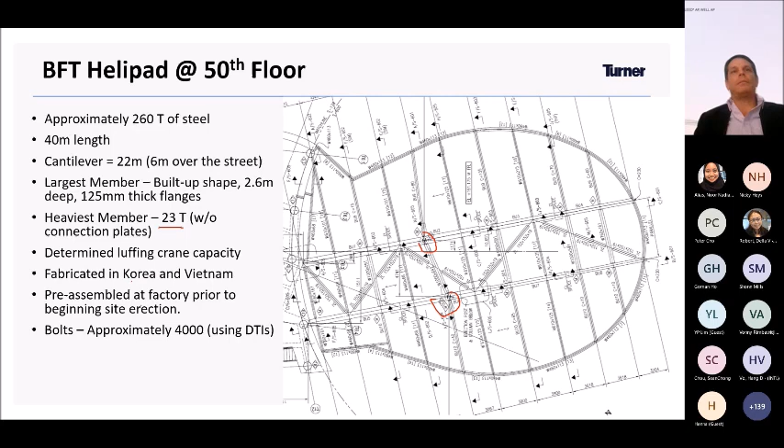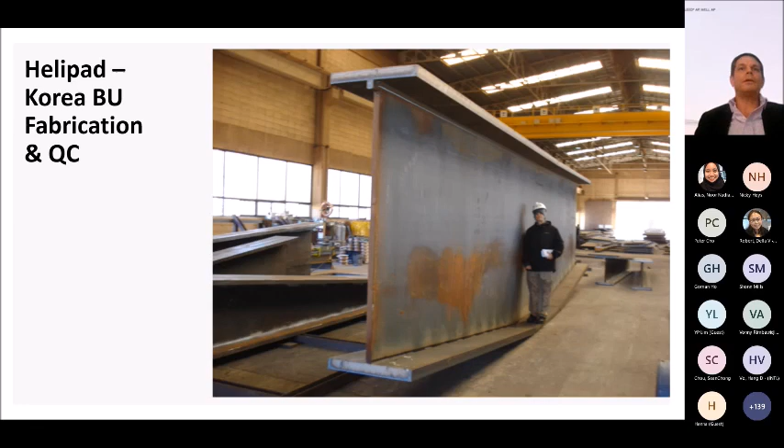And that's me on an inspection in Korea during the winter, very cold, hence the dress as such. And then we got all the pieces to Vietnam, and what you see here is actually a pre-assembly. And so this is one of the things where early in the project, when we looked at this, we added it to the structural specification. We said this needs to be pre-assembled and completely built, and then disassembled and built on site. And the reason for that was we wanted to make sure everything was fit up.

And even though it was in the specification, as things happened, the fabrication was a bit delayed, and there was a rush to get things up in time to complete the structure. And we ended up having to argue a bit with the contractor, because there was a push from some of their people saying, look, we don't need to do this. It's been fabricated properly. We'll just put it up on the building. And we had to fight for it, but eventually we won, and we said, look, we're going to erect this on the ground, make sure it all fits up.

And when we did that, we spent 3 weeks reaming bolt holes in order to make it all fit. So you can imagine we had 4,000 bolts on this, and there was quite a bit of reaming and rejigging and adjusting some of the connection plates that are much easier done near ground level, where you can just build the scaffolding up and work on them, as opposed to having to do them 50 floors up and over an active street. So this is one of the things that worked out quite well, and pre-assembly is highly recommended anytime there's some sort of feature like this. It will save a lot of trouble on site.

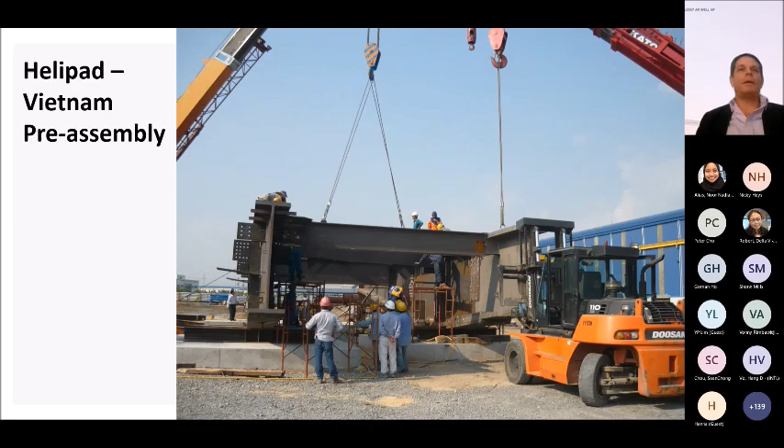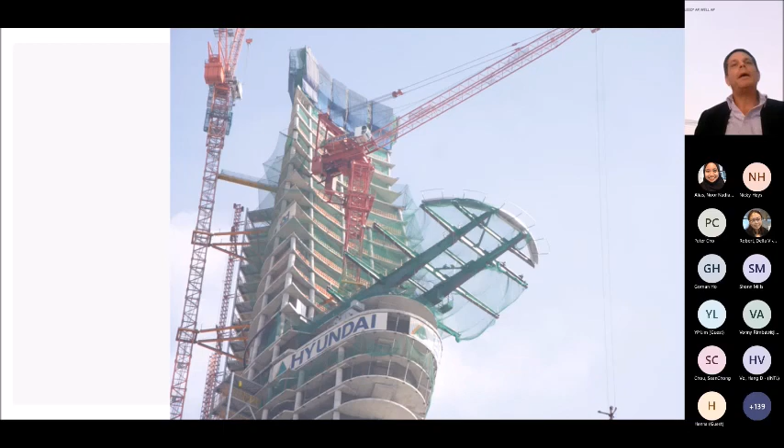There it is in its full structural state. This is taken from the crane above. This is, again, in the days before drones. And then this is the metal deck. So metal deck and studs. And then this is after the concrete was cast, and not really the best job of curing, but it is what it is.

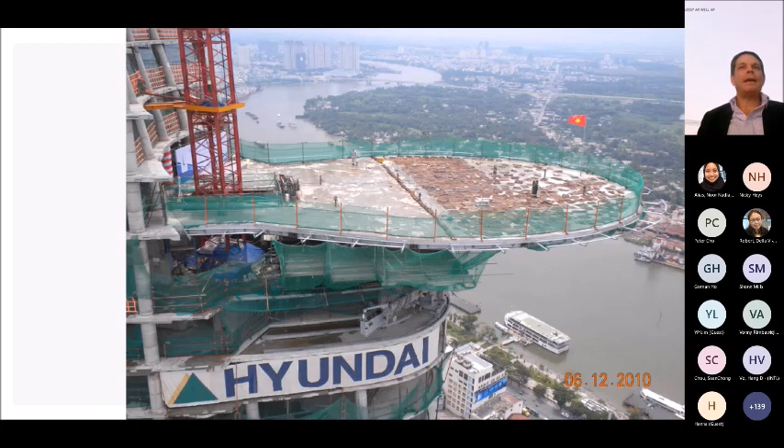Okay, sorry. So how long does it typically take for the settling to result in the horizontal? Okay, so if you look at it, there's 2 types of settlement when it comes to axial shortening. You have up to and sub to. So up to is sort of the elastic shortening that happens with initial loading. Then sub to is subsequent to, meaning that after you're in place, you have additional loading coming, the elements start to settle more. And so the elastic happens almost immediately, but it's incremental because every floor you build up adds a little bit more weight to it, and it shrinks a little more.